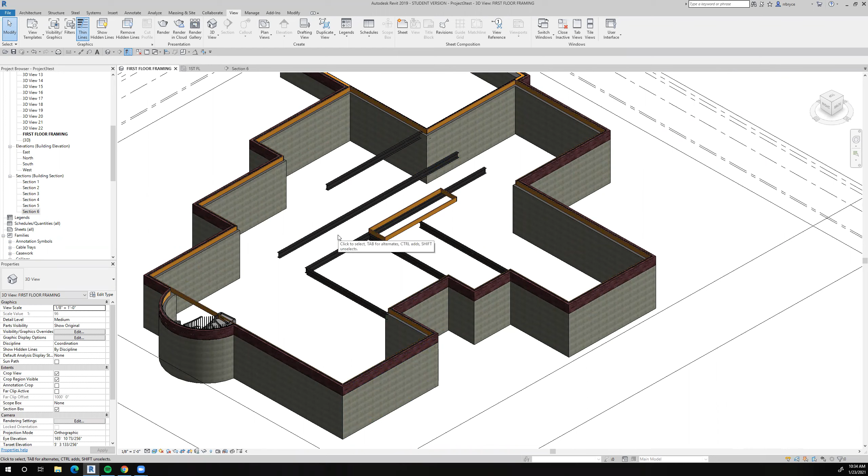We've placed our steel beams in the basement level, underneath the first floor framing, where we think they should be. There will be a little bit of fine tuning, but this is basically what we have right now. Now we want to put in the floor joists, which will carry the loads of the floor. Most of the loads will be transferred to the bearing wall loads, which will be transferred to the beams below.

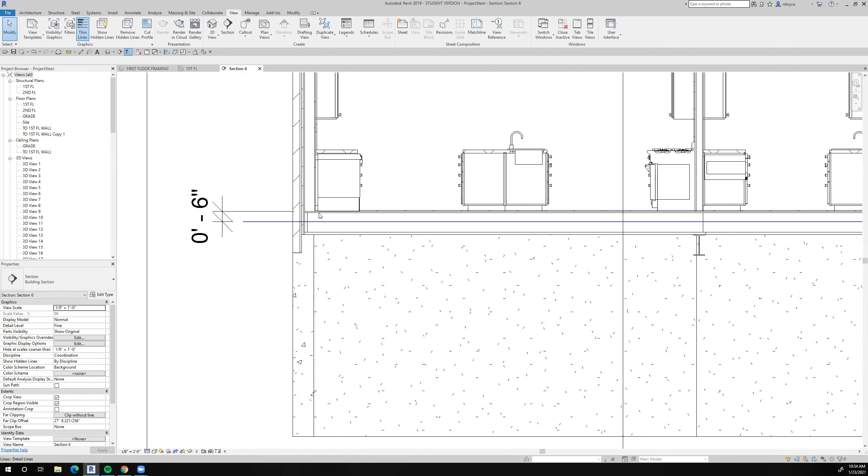So if we go over to the first floor now, I'm working in my structural plan, and I've changed the view range to -6 inches. So if we take a look at this section, what I'm saying is I want Revit to cut below the first floor by 6 inches.

This red line represents where the cut plane is. I'm cutting through so I can see my rim joists, and then I can see my beams below that. If I cut above the first floor, I wouldn't be able to see that.

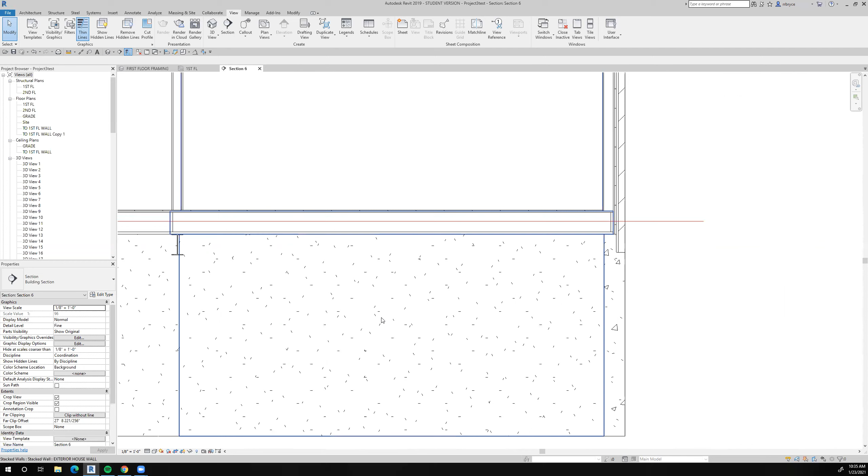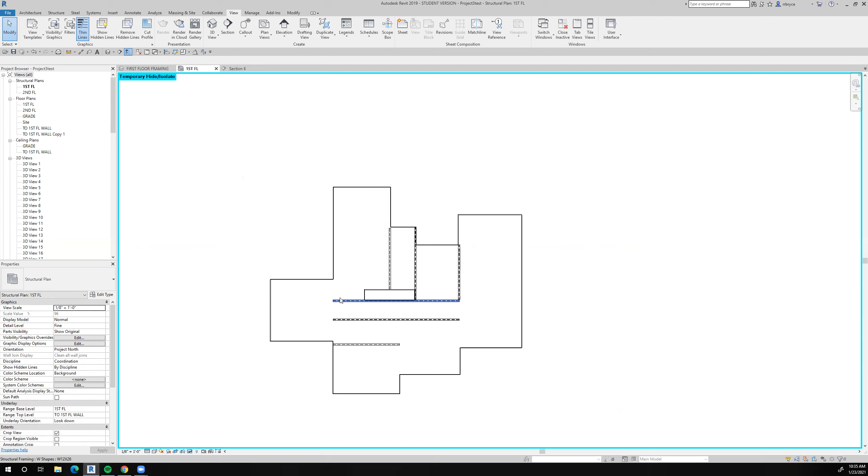If you look at the view range—I'm not sure why that's happening. Oh yes, because I'm not in the first floor plan. So if we look at the view range, I'm saying the associated level is the first floor, but cut 6 inches below that to show me what I want to see.

Now I can see the rim joists all the way around, and I can see where I've placed my beams.

Now I want to do a little bit of cleanup, because I know this beam isn't going to sit on top of the basement wall there. So I'll bring it back and try to line it up with this. Let's do the same thing here—we'll bring this one back all the way to there.

And let's put in our first structural system. I'll go over here to my structural system, and I'm going to put in a beam system now. Let's take a look at what the constraints are of the beam.

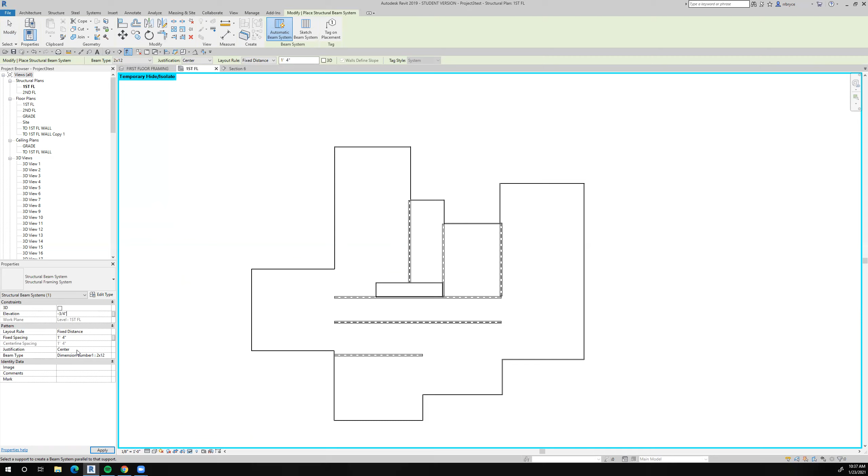It's 6 feet spaced apart, and we want our floor joists to be 16 inches on center. We want our beam type to be 2x12s, not the W12, so we'll say 2x12s. The work plane is the first floor, but the floor joists are 3/4 of an inch below the first floor, so let's put this at -3/4 of an inch, because the plywood subfloor sits right at the first floor level and it's 3/4 of an inch thick.

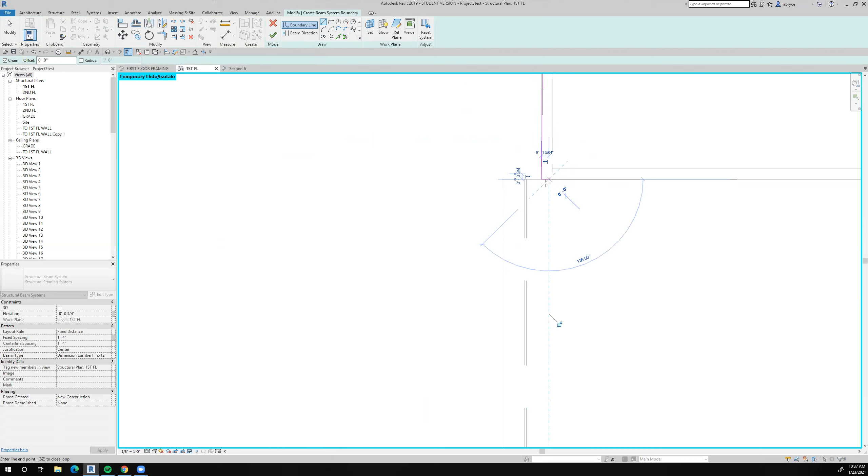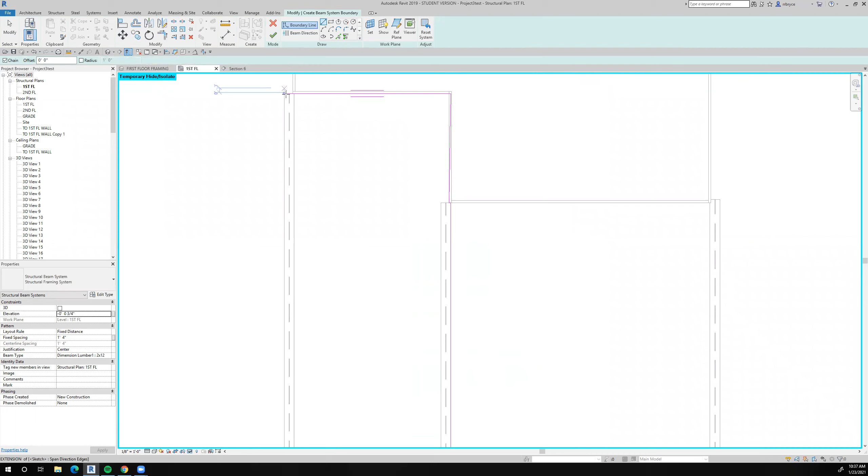So let's pick an easy one first. I'm going to sketch, and now let's draw it. I want my beam system to come across and rest on top of the beam, but go right up against my rim joist. I missed that by a little bit, so I'll zoom in and clean that up—I want it to stop right there. And then I want it to go all the way from here down to here.

So what I've just done is define the perimeter of the floor joist. This doesn't look right, so let's see if we can clean that up. Yep, that looks better, that looks good.

Now these double lines represent the direction of the framing system. If I wanted the framing to go front to back, I would say beam direction and click on a line that goes front to back, and my framing would go front to back. But I actually want it to go side to side, so that's the direction I want. Let's say okay to that and see what happens.

There we go, look at that—my floor joists are in there. They sit on top of the beam all the way at this edge, and they sit all the way at this edge on the beam here. Then they only go to the rim joist; they can't go beyond that.

So if we take a look at that in 3D, that's what I did—I've put in our floor joists in the first spot there, which is right there. That's what we want to do. So back to the first floor—remember, we're working in the structural plans now. Let's put in the next set.

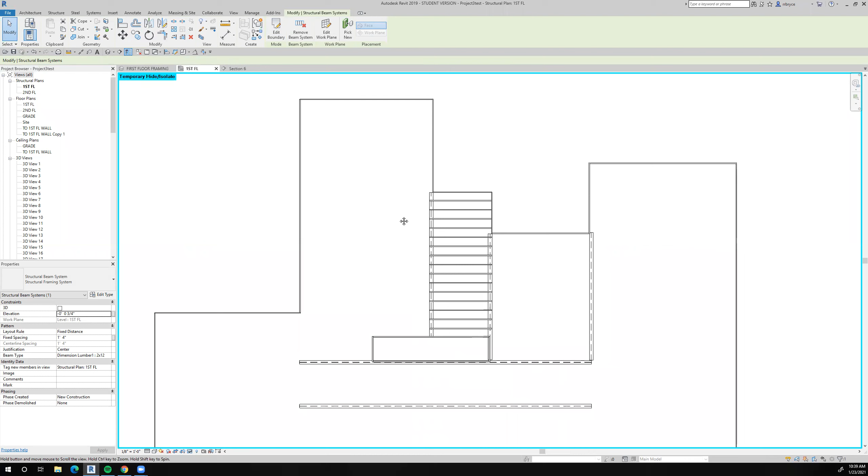So, structure, beam system, sketch it. I'm still going to draw the perimeter instead of having Revit do it automatically, because it doesn't seem to think the same way that I do. And now I want these floor joists to sit on this side of the beam.

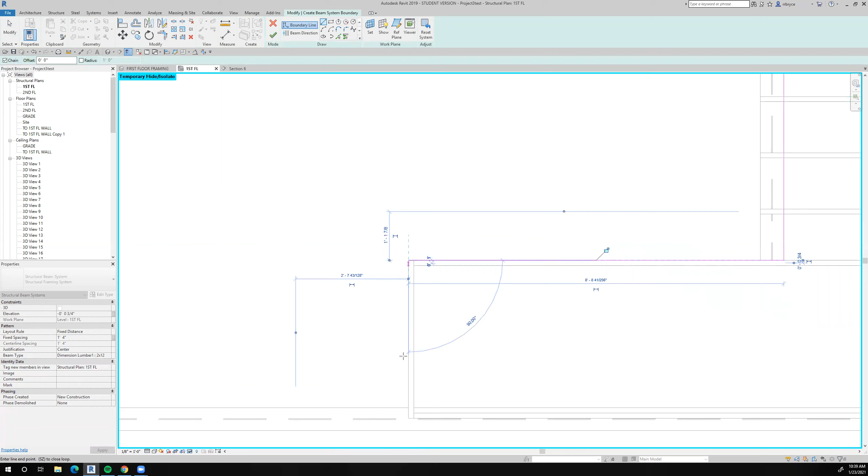We're going to come to here and down to here. It's not going to sit on this beam. Then we'll go back up to here, and I'll just clean it up real quick and align it over here with this face.

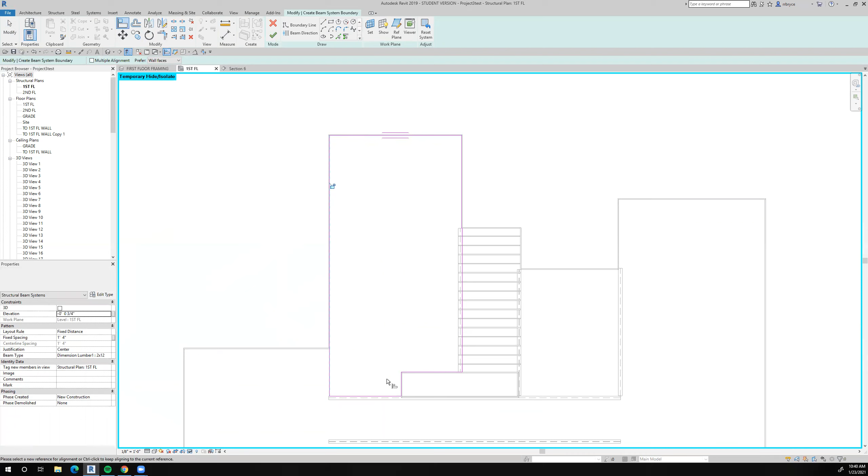Okay, so now the direction of the floor joists are going to be in this direction, and I will say okay to that. Now look at what we have. The truth is that these guys really are going to be aligned with each other.

So I want to try to pick this system, and I'm having trouble doing that. Let's go to that section and see if I can pick that floor framing system. If you click here, you can see the dashed line. Now I'll go back to the first floor.

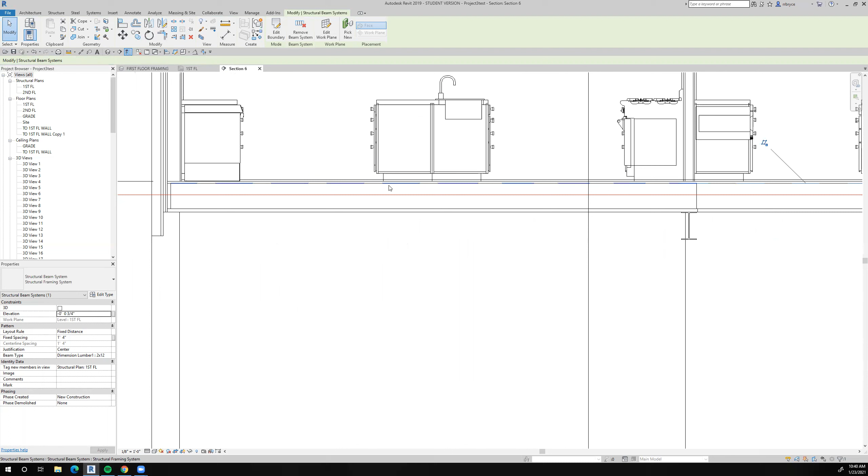What have I selected? I think I selected this over here, so I want to select this. We'll go back to the section. This is the system that I want to select. See that dashed line? That's how I'm selecting the system.

I'll go back to the first floor, and I've selected that system. I just want to move it so that these guys line up with each other. See, that's because that's really how it would be constructed—there wouldn't be that gap. So that looks good, I'm going to save it.

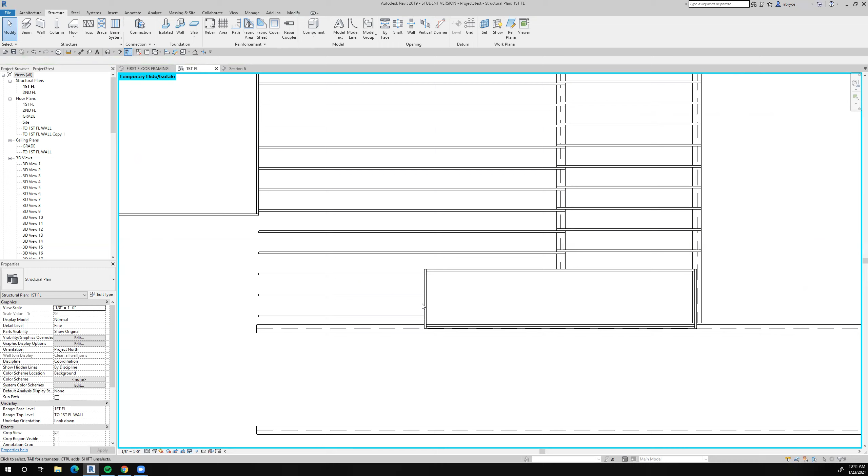Now I can see that I really don't have anything here that's going to support this end of these beams. These floor joists rest over here and I have nothing to support them. So right now they're really just floating in air, and I'll have to come back and fix that later.

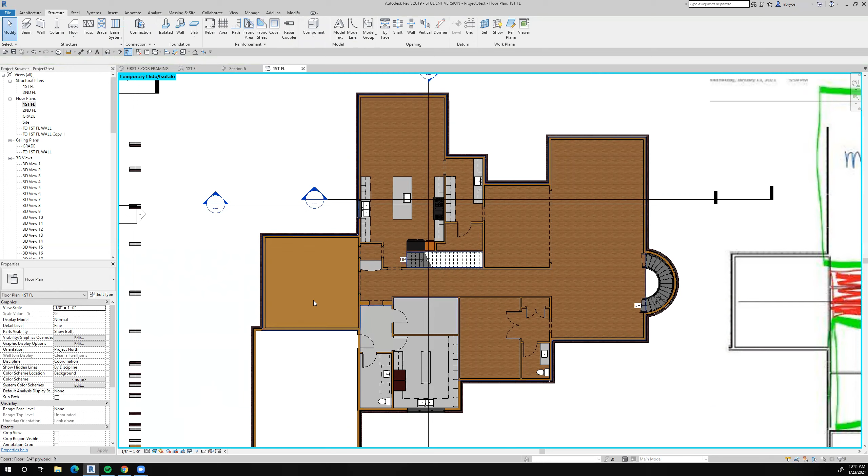So let's put the third one in now. And I looked at the— let's hide this. We can hide this too. I just want to see which is the shorter span.

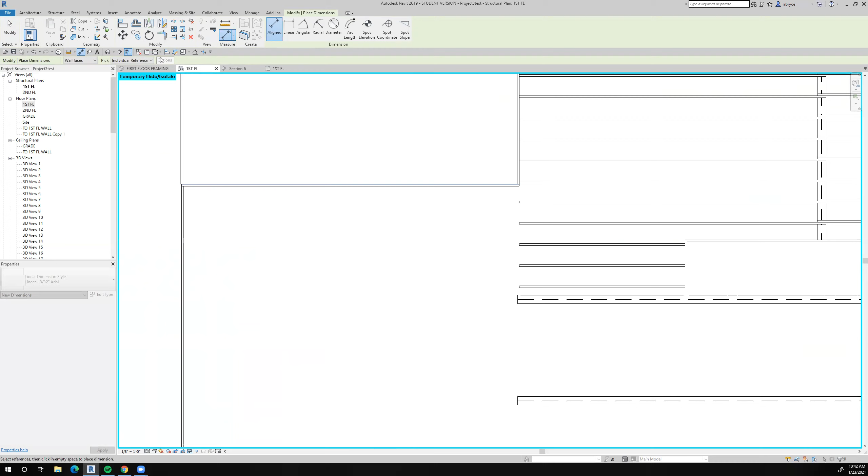Because I'm saying in my framing, I think this is the shorter distance. Now we could measure it here too. Let's go from here to— whoops, well that's all right. Let's do it again, we'll go from here to there. And I have my dimensions turned off.

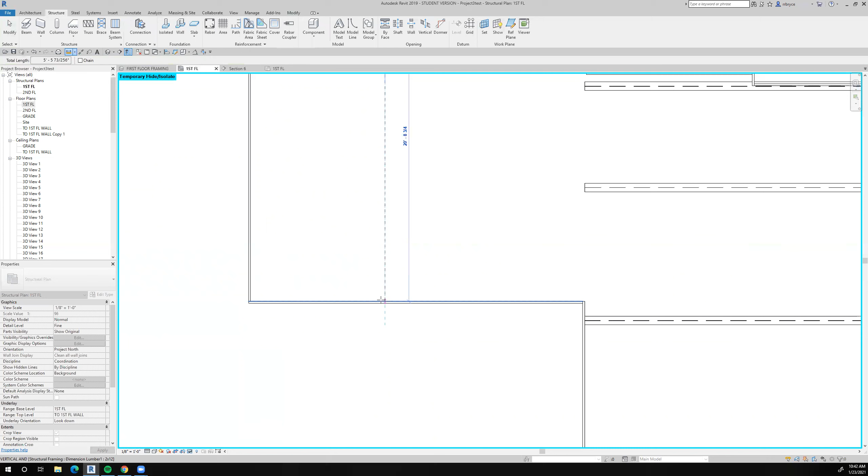So then I'll just use the measure tool. The distance from here—I want it to go in the shorter span. So that's 20 foot 8 3/4. That's a lot. And over here, the span is 20 foot 8.

I know that I have a basement wall underneath here that's going to shorten that span. So I'm going to still go front to back. So beam system, sketch it.

Let's try a rectangle this time. I'm going to go from here, maybe to here—let's see how that lines up there. No, I'm going to extend that to this guy right here. Okay, that looks better, all right.

I want it to go front to back, so now I am going to change the span. We'll go over here, beam direction. I'll click on this line and say okay. And now look at it, goes from front to back. Okay, so far so good.

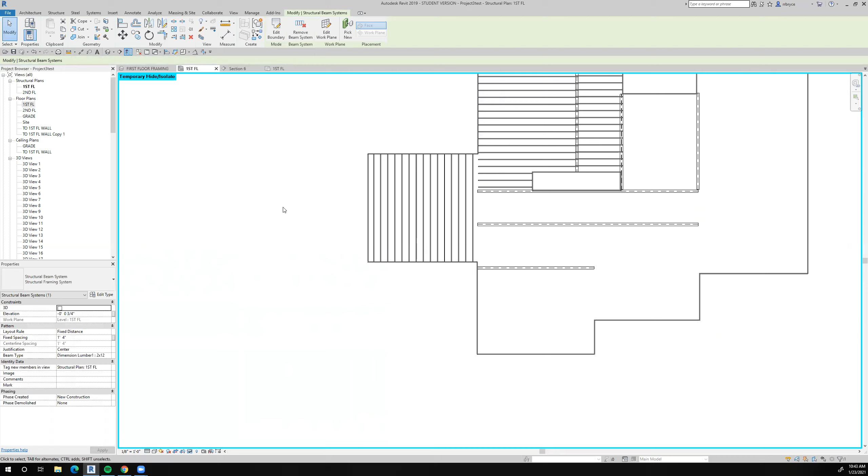Let's put this one in because that looks pretty simple. Structure, beam system, sketch, and we'll go from right here all the way down to right here. Now I know that's front to back, but right now it's looking like it's going to span side to side, so I'll change my beam direction. I want it to go front to back. Look what happens—look how quick that puts that stuff in there for me.

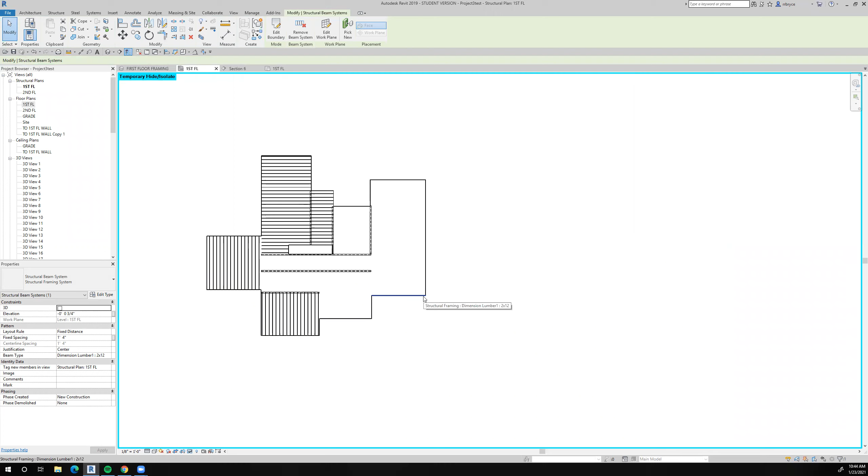All right, now this side, I know it's going to go side to side. I might want this beam to come all the way down to here. Whoops, that didn't work. I might want this beam to come all the way down to here.

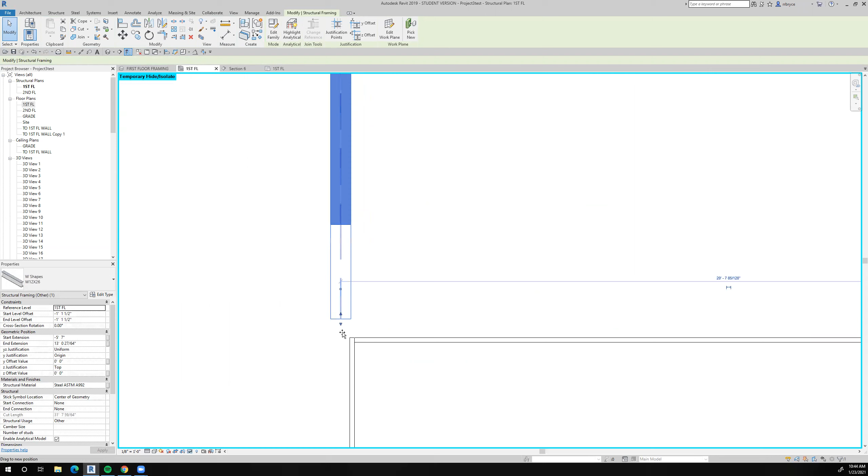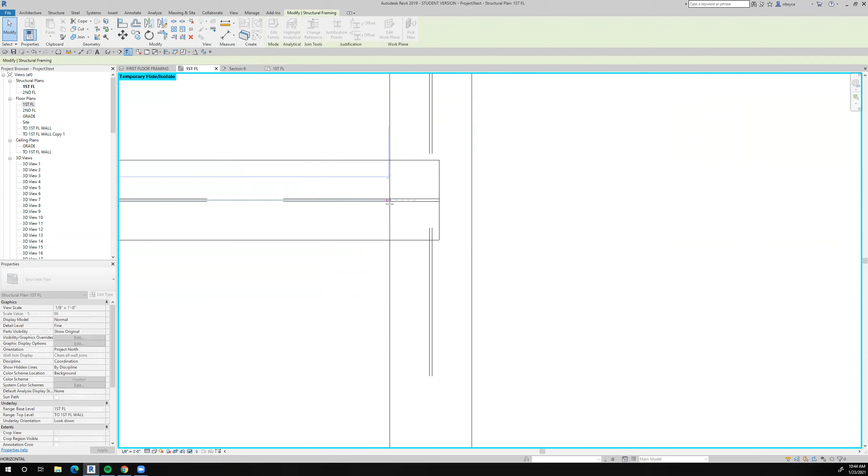You might be hearing some noises in the background, and I apologize for that. But I'm on my boat right now, and it's a windy day, so we're hearing some creaking—actually what we're hearing is the lines attached to the dock making some noise right now. I'm pretty sure you can hear that in the background, and maybe you can even hear the wind as well. But I apologize for that.

Okay, beam system, sketch.

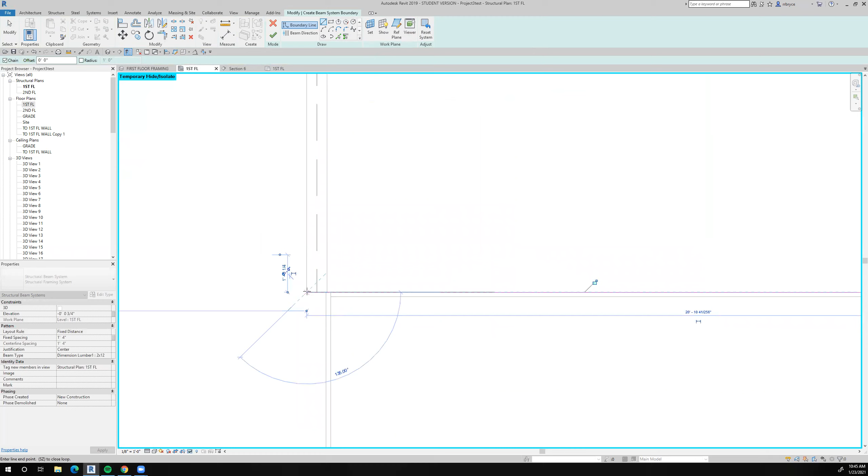Well, we can start this way. I did pick the line, so we'll just come across to here, down to here. Now I want to go all the way over because I want my floor joist to rest entirely on that beam. And they're going to come back to here, then over, and up to here.

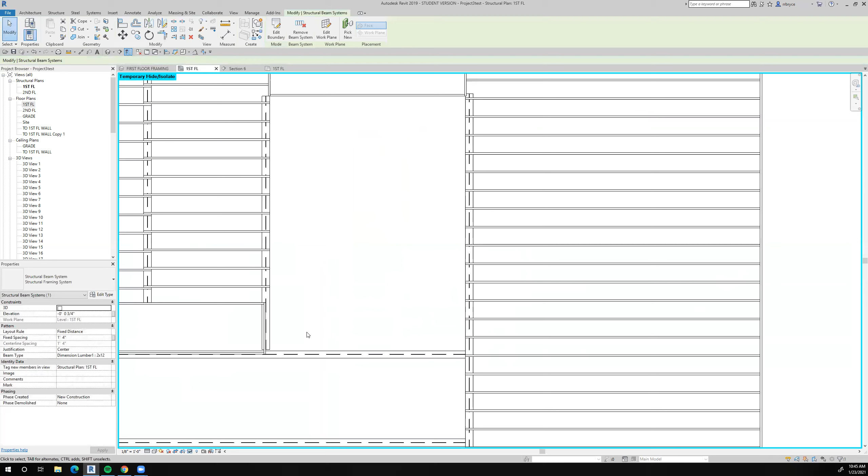Now, the direction I want it to span is side to side, so I'll say okay to that. And now I have another one to put in, which is going to be perhaps the easiest one to draw.

Structure, beam system, sketch it, draw a rectangle. I want it to go from here all the way down to which way? This is going front to back, so it's not going to rest on top of that beam. It's going to come in this direction.

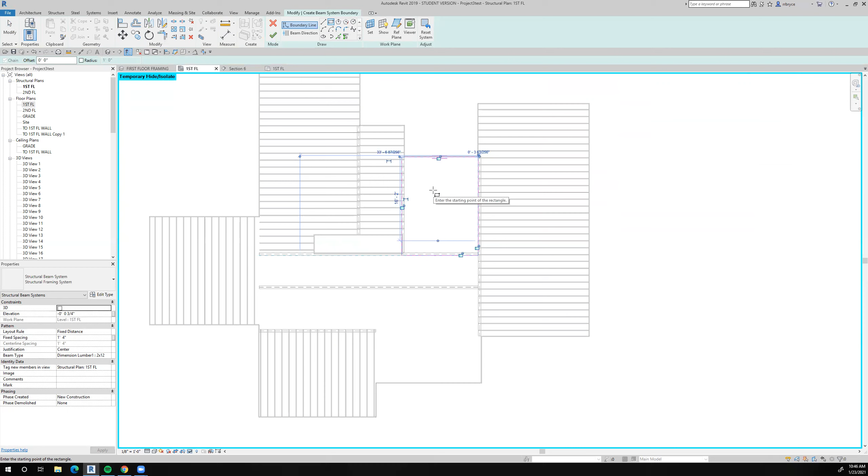No, that might not be correct. I might want it to be going side to side. I think I do want it to go side to side, which means that this guy, I'll use the align tool. And we'll bring it all the way over to there.

And then it won't rest on that. All right, that looks good. It's the right span direction. We'll say okay. And now I've got another one in there.

So what have I got left to do? I've got two more systems to do, and then I know I have a couple of spots that I have to fix or fine tune. And that's not uncommon, to have to go back in and fix a few things.

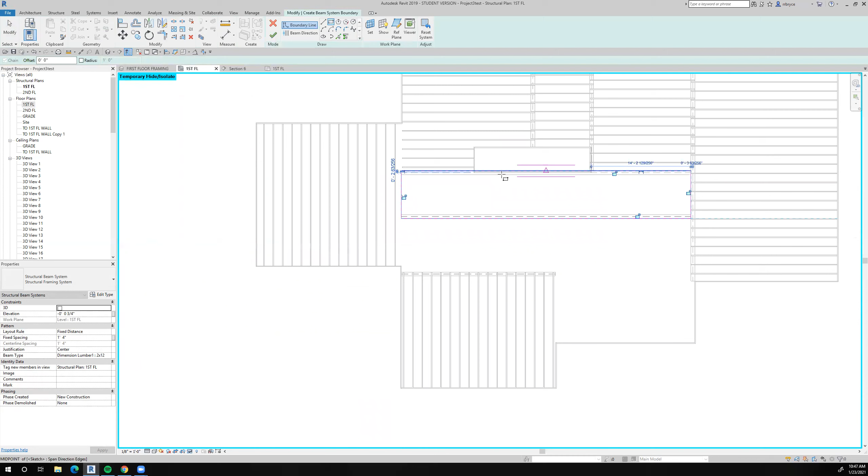So I'm going to go from here all the way down to here. The direction right now, the double lines are going that way, and I want the direction to be this way. So I'll just simply click on this line right here. There's my double lines, and I'll say okay. There's my framing for that.

And then this is all going to be, I can draw that all at the same time. Structure, beam system, sketch, and I'll just draw the lines. So I want it to go all the way to here.

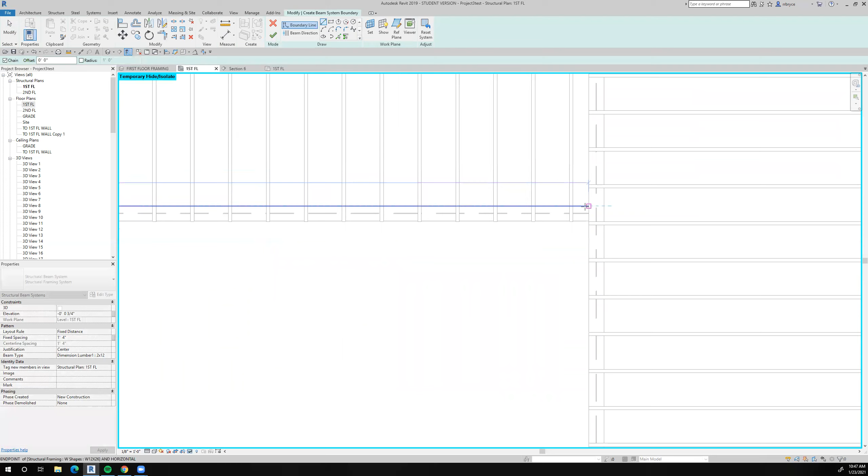It's got to rest entirely upon the beam, and then it'll come down to here, over to my rim joist. Didn't quite get the end of it, so I'll come back and align that in a second. Let's see if I can get that.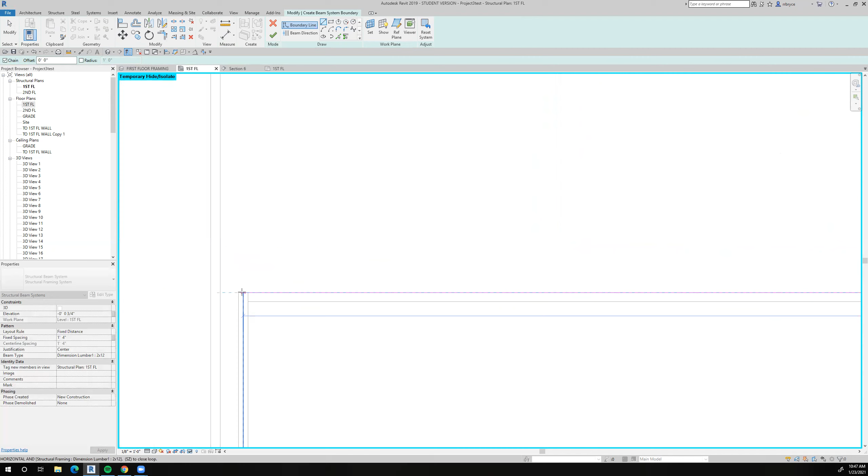I can go all the way over to this guy, up to this beam. It's going to rest on this side of the beam. So we'll come across here to the rim joist. Let's put it right now, we'll put it up to here, and then I'll come back in and fix that.

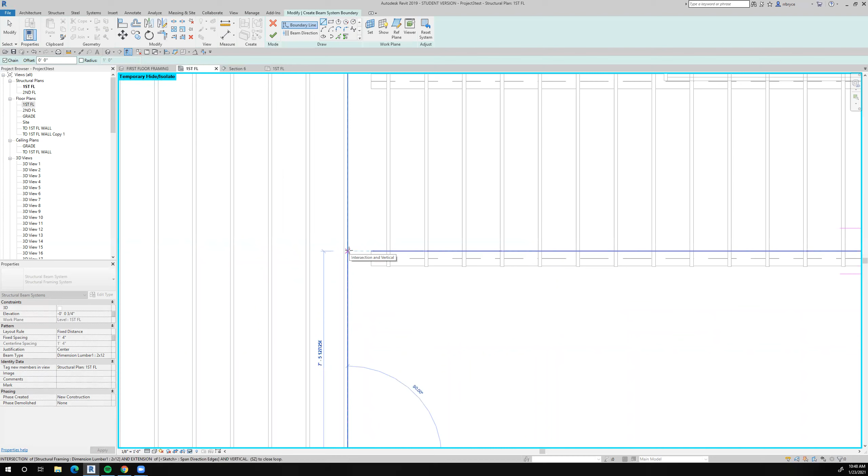What should I do here? I think I'm okay with that. I'll clean it up a little bit, and then I'll have to extend the beam. Now, again, notice which direction the floor joist is spanning with these double lines. I want to change the direction, so I'll click on that line, and then I'll say okay.

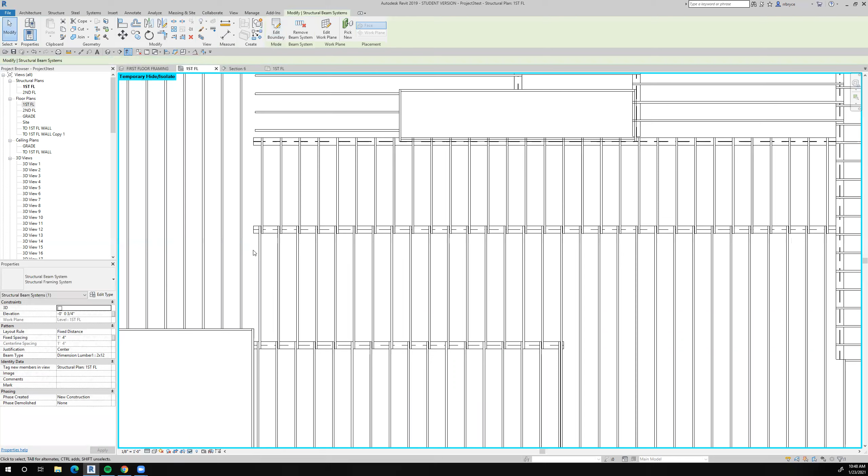And that's pretty close, but I guess we're okay here with these. This is going to need some attention, because there really isn't anything supporting the ends of these beams or floor joists. And I've left an opening here for the stairs. So that looks pretty good.

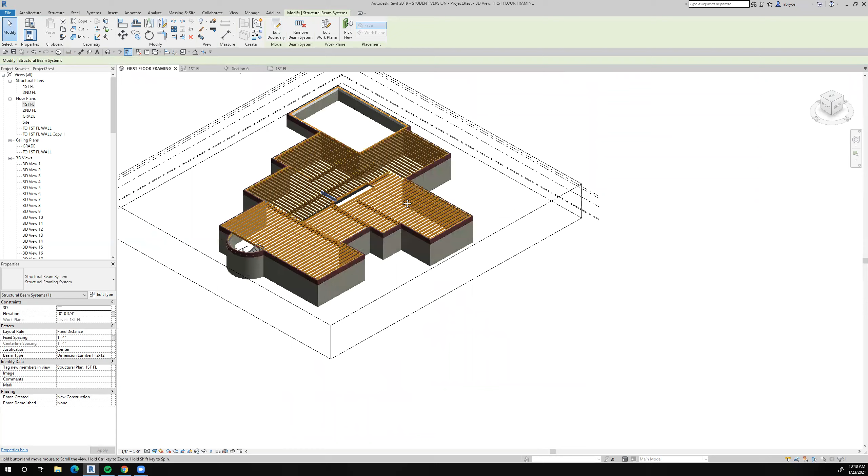Let's take a look at it in 3D. There's what I've done. You can see here, these guys don't have anything that they're resting on. And I'm going to double or triple up these 2x12s, and that might support the end of this.

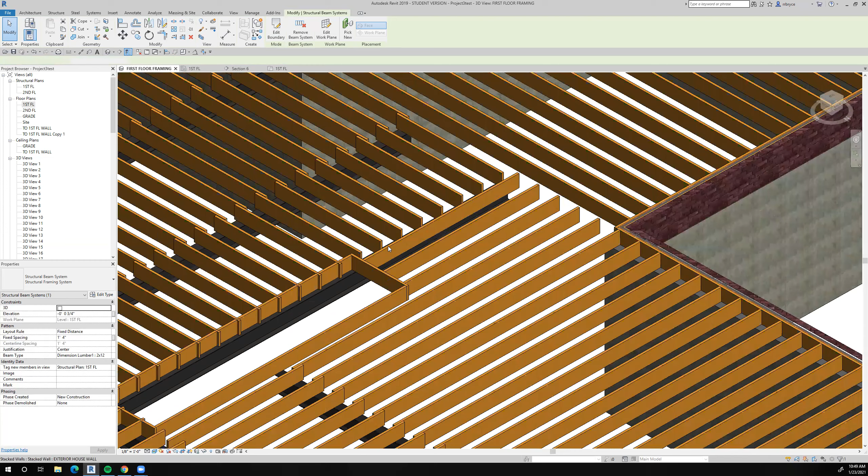But for the purpose of this demonstration, let's spin it around a little bit. Yeah, for the purpose of this demonstration, there's our first floor framing.

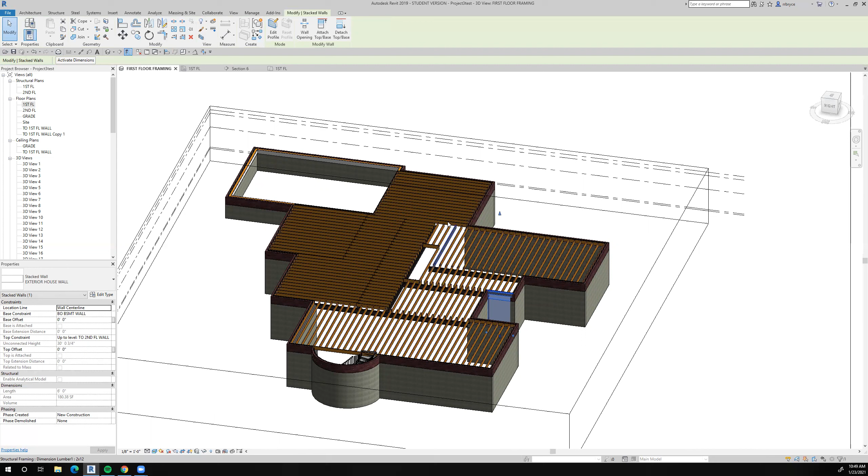I've got support underneath the bearing walls above, and I've got my floor joists in there to carry the floor loads themselves, and there may be some walls that sit on top of that. Generally they're not bearing walls, so they can rest on top of these floor joists without having any kind of steel beam underneath them. But there's a little bit of fine tuning, and we'll talk about that later on. Anyway, this looks pretty good to me, so we'll stop right here.